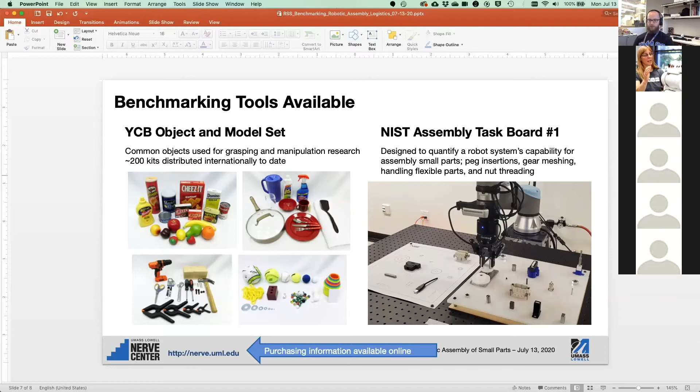There was a question from Brian O'Corn asking what the cost of the NIST task board is. So that leads me to our promotional opportunity: as attendees of this workshop, you have the ability to apply for a free board.

If you are interested in acquiring more than one task board this year, I don't have the exact figure, but I believe it's about $175. That's about half the actual cost of the materials, because we currently have a grant to assist in proliferating these. But after this year, the cost will go up to, I think, between $300 and $400 a piece.

But now that we have a group of people with vested interests in the same room, we've put together a simple form for applying for the task board.

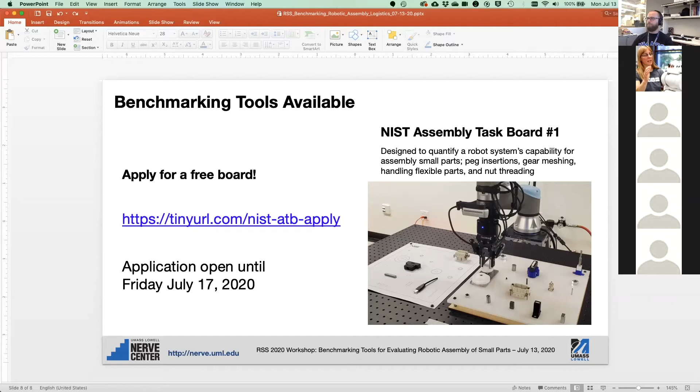What I wanted to use the remainder of our hour for is a discussion period, not particular to any one talk or necessarily the NIST assembly task board itself, although we would like some feedback on that. We want to start to pull together a working group that could function inside of this IEEE standards activity that Joe mentioned. Even just as users of the benchmark, we want to ensure this remains relevant and that we can continue developing the benchmark or future benchmarks to match the needs of the community.

I just started this document with a couple bullet points discussing the current state of the benchmark, and I know there are 3 variations of the board available. I don't know if Joe or Kenny want to start us off, if there are any plans to continue expanding those variations or anything already in the queue.

Kenny, you got anything? Is it okay if I start? Yeah, you can go ahead. Yeah, so I mean, I think we do have some plans to try to work on tolerancing.

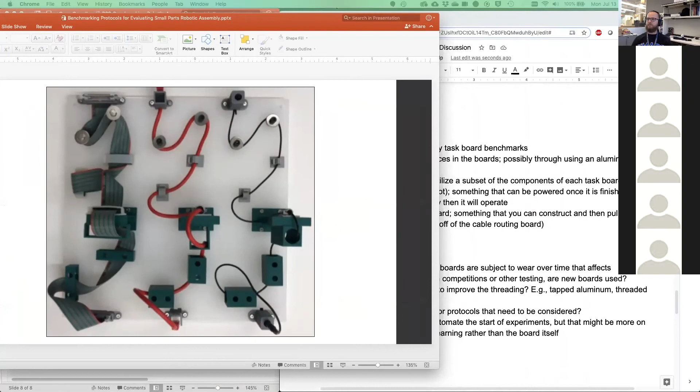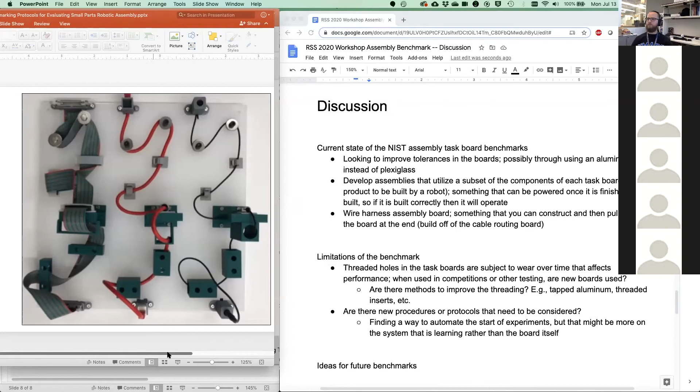You can see the green parts, the 3D printed parts, are completely enclosed. We certainly want to push different vision solutions or dual manipulators, but maybe this isn't the place to do that. What are your guys' opinions on how feasible it is to have those channels closed like that? Do they need to have the slot in them like the competition task board did?

Maybe a better question would be, is there anyone on the call who interacted with this board at the competition and locally?

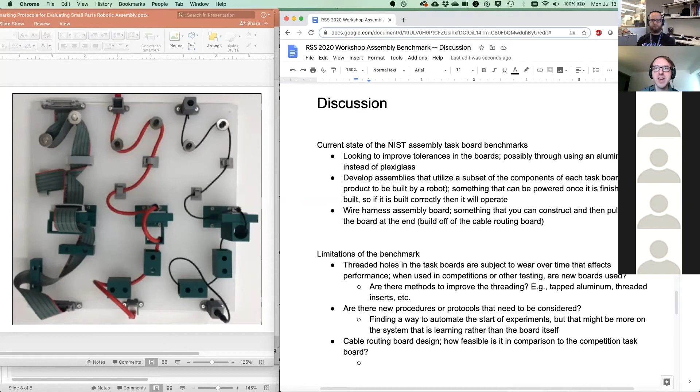So we didn't interact with that particular board. We interacted with the quadrant on the IROS 2019 board. That was kind of difficult for us to tackle, just because we didn't have the bench strength to do flexible cable modeling at all. So we were dealing with that in kind of a very rote way, just because we needed a deeper team in order to tackle that. It's kind of a large turn from almost everything else on the board.

It's challenging and interesting, because that's a problem that has to be solved, since any large product like a car is going to have cables running everywhere on it. It's just that it was difficult for a team our size to deal with, but I think we had one of the smallest teams at IROS then.

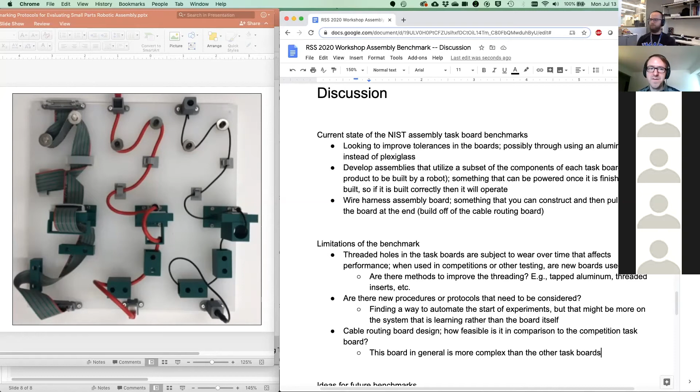I think some aspects of fasteners are just fasteners - I don't think they're going to redesign fasteners for robotic assembly. But when it comes to little plastic components for routing cables, design for manufacturing is a viable route to take. So I think we should take that into account and come up with routing channels that are adaptable to robotics, whether we design them ourselves or find them commercially available.

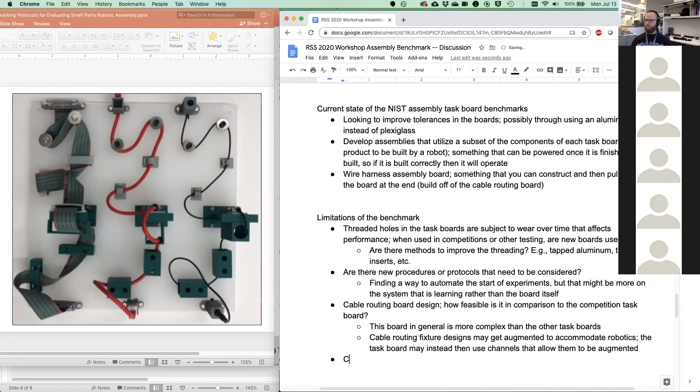So as a follow-up question, is there any benefit to having a task board that is more vision-based, that has tasks where you specifically have to hide something and regrasp it, or something of that manner? Is anybody interested in that kind of task board?

To clarify, you mean a board where there are areas that will become obstructed over time, before or after you perform tasks due to task progression? Yeah, I was kind of being vague on purpose. Maybe it's the AR tag that's in a different orientation than the rest of the board, and so that causes its own issues. Maybe there's a big vertical baffle that makes it complicated to see the parts behind it at certain angles.

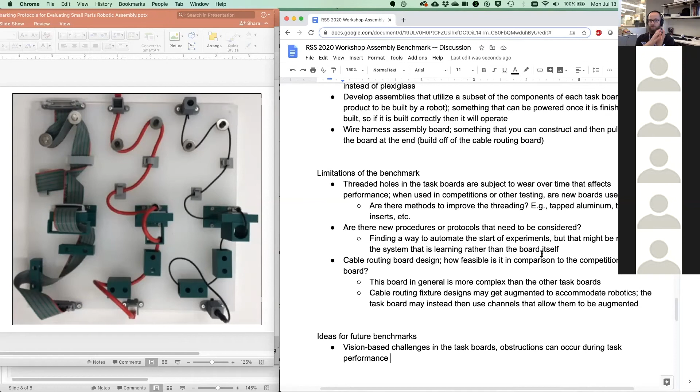I certainly think as we start to think about these as larger sets of tasks, as opposed to individualized pieces—kind of like James's comment earlier about how when you perform one task, how does it impact the next? There's a variety of considerations, even just the amount of time it takes and propelling you down the set of tasks, but also how they might obstruct each other, or how being inaccurate on a previous step may affect your accuracy on the next. This board starts to get at some of that, and I imagine those types of challenges are things you'd encounter in real manufacturing environments.

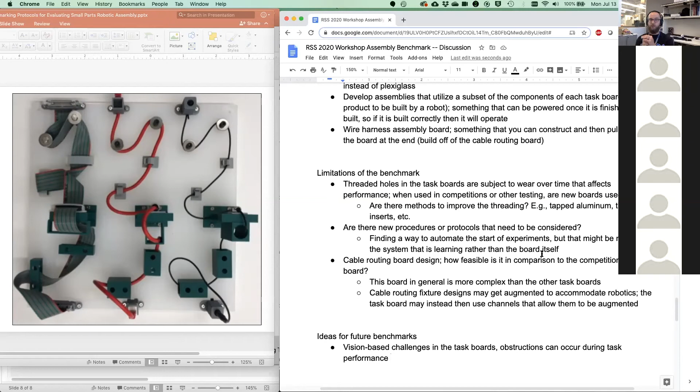Yeah, and I was thinking maybe specific tool parts that are very similar in size and shape can cause other vision issues—being able to identify one from the other. The Siemens gear assembly actually has two pegs that are similar enough that they can sometimes cause issues.

It would also be interesting, on the topic of vision, to eventually have a transparent object. Or maybe dealing with negatives, more negatives than just round holes.

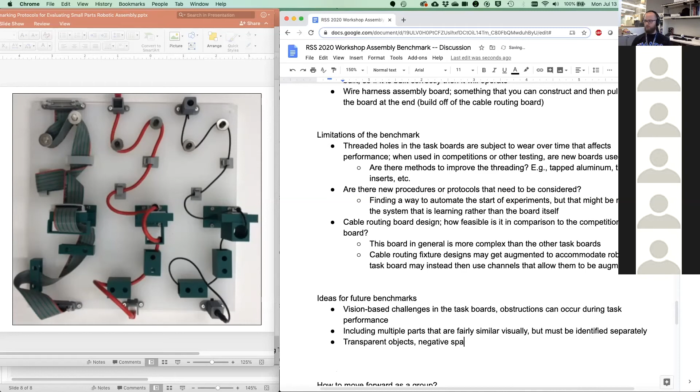Yeah, the negative is interesting because in the current design of these boards, I've always been curious about the use of the plexiglass material for reflectivity and things of that nature—finding the hole and assuming the material underneath is contrasted enough color-wise that you could see the hole from a top-down view. As you get into using channels or negative spaces, we have to be really considerate of how those are detected.

And I'm curious what it would introduce in terms of how to fabricate it, like our questions about threading—how to make those negative spaces in a repeatable fashion. Because right now, I'd think you just etch it away until it's the sufficient depth or what have you, but that has a lot of variation implicit.

Okay, what about outside of the assembly task board? Because there are other areas we've touched on today related to manufacturing—like watch assembly, which deals with even finer resolution and tolerances than the board presents, though maybe some qualities can be applied to other domains. What are some other areas for assembly or manufacturing-based capabilities where benchmarking tools could be really beneficial?

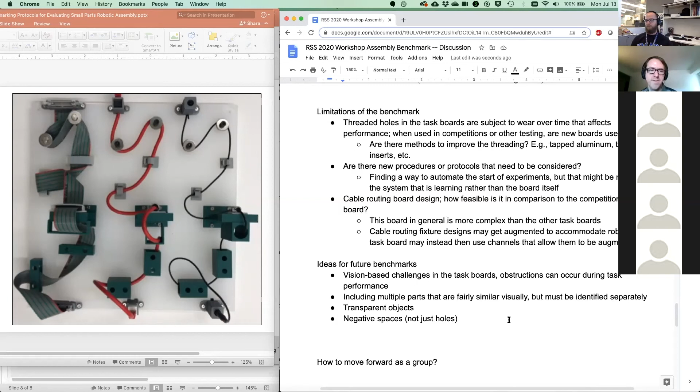I think it'd be interesting—go ahead, Juan. I was quickly saying, on the same topic, most of the insertions right now are vertical. So something that requires an angle insertion or a more complicated motion to be inserted, that would be interesting.

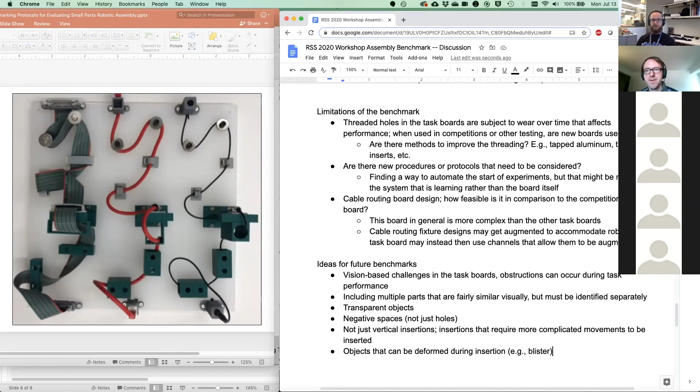It would also be interesting—still insertion, but if you can really deform what you're inserting, like a blister or something. So if you press too hard, you're actually breaking it. But again, these are probably more into the same area where the NIST board addresses right now, and that's fine—if they fit into the NIST board, all the better.

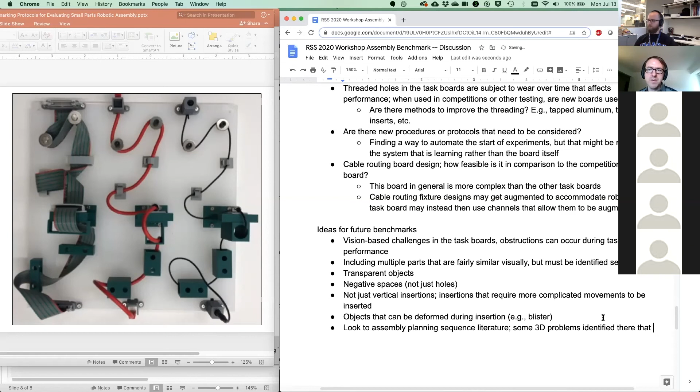Yeah, go ahead, James. Oh yeah, I was saying if we're looking for inspiration, we could look at the assembly sequence planning literature. That's something that's been going on since the 1980s, with a few three-dimensional problems that have been passed around and reused, and new ones added, existing virtually as STL files. There are many methods for dealing with those 3D models and putting them together in an appropriate sequence. But I think it would be interesting to start bringing those into the real world—that's why I'm in this subfield, because we're moving from years of working on virtual ideas to executing on them. That would be an interesting place to look for inspiration.

Joe, did you have a comment?

Well, I like Juan's idea about deformable objects and insertion. I think his point was that if you apply too much force, something could fail or break.

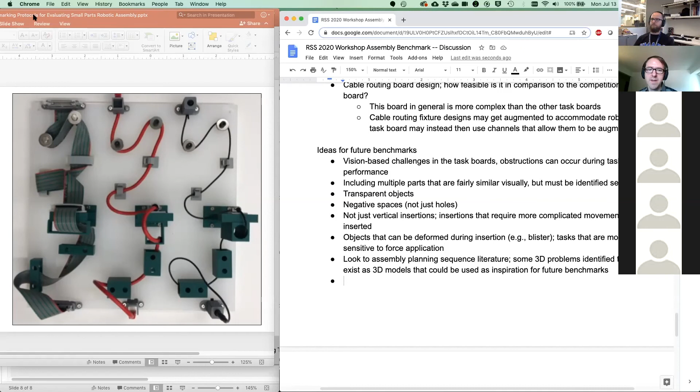One thing I wanted to mention is that the NIST task boards are designed so that you could easily fixture them in a different orientation, although we make decisions not to do that during competitions based on how far teams get. So we try to make it easy, and we want people to succeed somewhat.

But if you move on to an overall assembly, if we create an assembly out of components from all the task boards, similar to what WRS did, many of the components are going to be in different orientations. That would take care of the issue of requiring different orientations, whereas fixturing the task board would move everything into the same orientation, just a different one.

This is Cindy. Just a couple of random things. One is tying knots. I've certainly seen the ability to manipulate something flexible. So can you actually tie a knot?

The other thing, when I watched the Boeing assembly, one of the things that was interesting there is having to do two-hand manipulation, which is more challenging, like stabilizing with one hand while the other does the manipulation. I don't know if we're at all to the point of trying two-handed manipulation, but something where you've got to use one hand as a stabilizer and one hand to actually pick up and put the pin in.